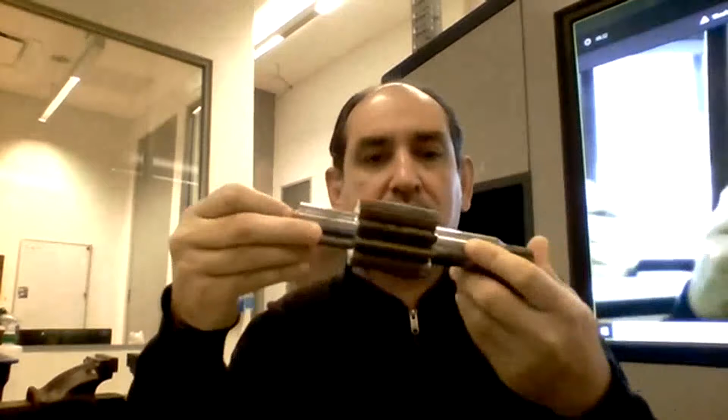We have operation number 2 until we have the 4 parts to be cut on the shaft. Later we hold it using the holes we had on both ends on the turning machine once again, and we do what we call the turning - this is called holding between the centers - and then we do the cutting of the gear using the gear cutter.

We set that to reduce machining time. We can have what we call the CNC turning milling center, which is a machine that can do both turning and milling at the same time, reducing time. Sometimes this can have multiple spindles, so this reduces the time for the turning and milling operations at the same time.

Later we need to hold the part once again, but between the centers we turn it. We use the grinding wheel to get a good surface finish on the sides. A special grinding operation should also be done for the teeth to achieve good surface finishing between the mating gears. Otherwise we'll get the gears stuck, which reduces efficiency and can stop the pump from working or starting.

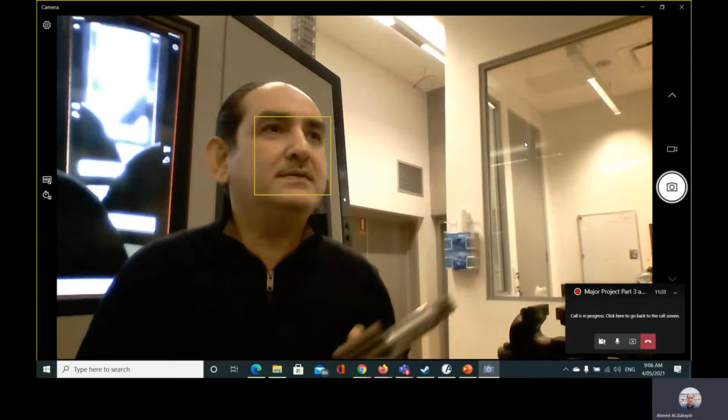To repeat what we just said, in the previous session we discussed how to make the shaft. We said the shaft is going to be done by cutting this bar on the milling machine, then the turning machine first, so multiple steps. The same thing applies for operation number 2.

We said we can accelerate that by doing the work on the twin spindle turning milling machine. Since it's a turning milling machine, the spindle itself has the indexing tool, which can be programmed to divide the circle into multiple stages, and then we can cut the gears and the splines at the same time.

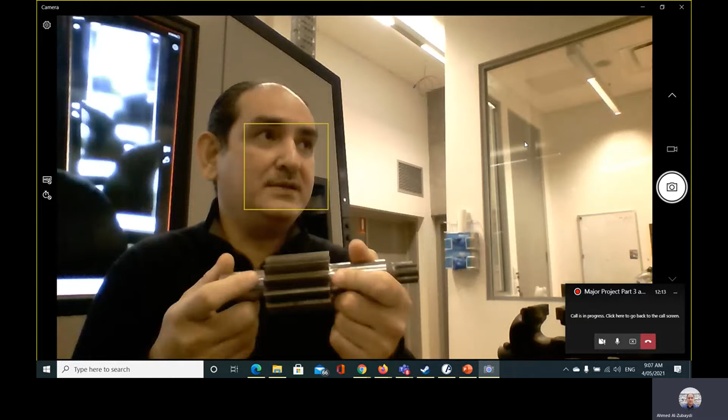Then we get the part finished. We only need to take it once again to the grinding machine to do the grinding process for the side, to have good surface finishing, and also we need to do some grinding for the gear teeth, because this is a critical dimension.

We should have very good tolerance between the gear teeth when they're mating, otherwise we're going to have an efficiency loss if there's a big gap. With close tolerance between them, this will hold the part due to high friction, or we'll get bad surface finishing. So this is a very critical dimension.

This is a very critical dimension because this will sit inside the bushes and should rotate at a very high velocity, so we should achieve that. Also the diameter of the gears, since they're in contact with the walls, should have very high tolerance in the dimension.

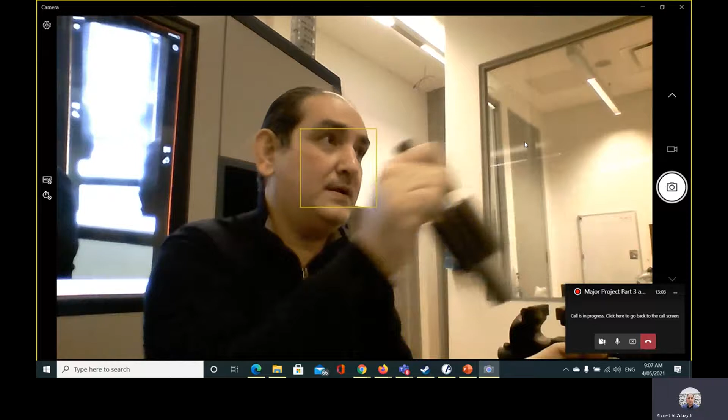So the next stage, which we're going to finish today, is how to make the main body. We said the main body is going to be made from ductile iron or gray cast iron. So you have two options.

Mainly it's going to be done by the sand casting operation. The pattern we are going to use is going to be exactly similar to that shape, but it's going to be solid, not hollow. The pattern should be solid.

We're going to make the cavity inside the two halves of the mold, and then we're going to use the core to generate the three cavities we're going to have here.

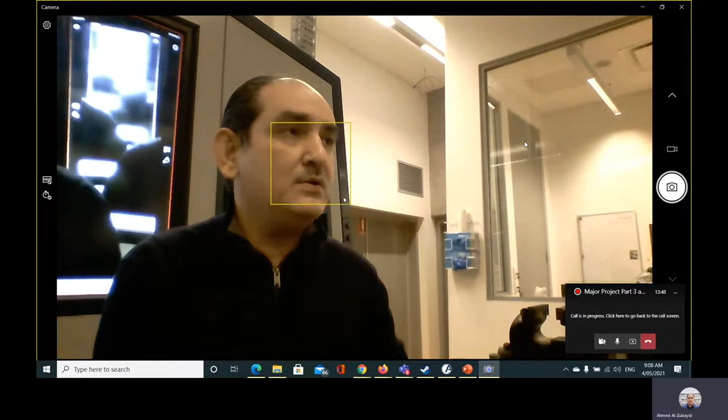Having these cavities gives us two important things. First, we save the material we'd need to remove later, because we only need to do boring for these diameters, saving energy and the amount of wasted material we'd otherwise remove.

In addition, from here we have direct access to the port. This simply creates the connection between the cavity of the gear pump and the port itself. This reduces the time for machining, and the complexity, since the height of the inlet is quite long and would require a special machine to do the work.

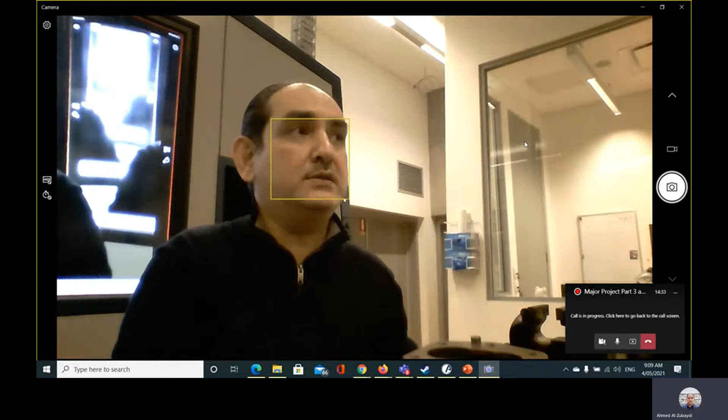After we achieve solidification for the cast part, we can remove the core. We said the core is actually going to be made of dry fired sand to be a little bit hard, and I prefer to have it as one part.

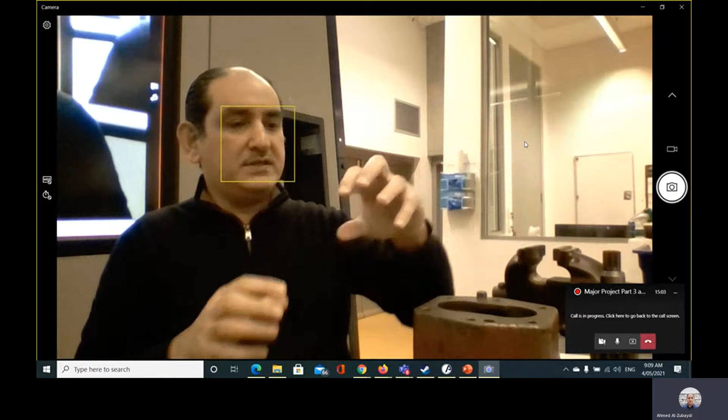So it's going to be something like the big shape of this cavity, with two extensions for the two ports, as one part, so it's much easier to hold inside the cavity, and also much easier to achieve the required shape internally.

We got the part, but the surface finishing for the cavity is going to be too bad, and the dimensions won't be accurate. We would like to have good surface finishing and accurate dimensions, and the way to do that is by doing the boring operation.

So first we're going to take the part, after we do the solidification process, to the milling machine.

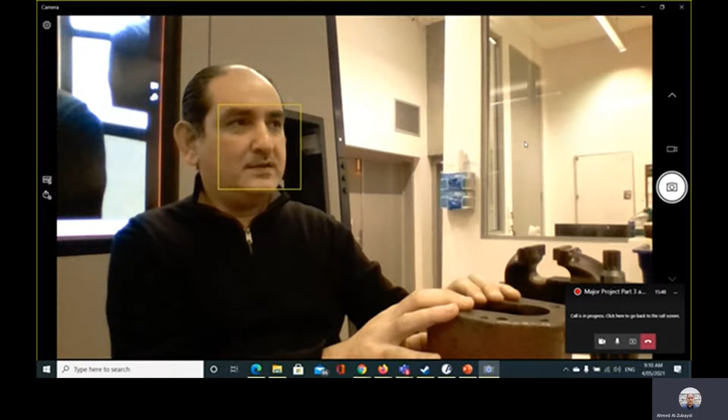So that's an example of the milling machine. You can see that I added the tool, which is the face miller, and by moving the part below the cutting tool, we're going to achieve the flat surface finishing there.

Even the holes, we can have the head of the drilling sitting on the milling machine itself. Of course, this is not a CNC milling machine, this is a manual one, but it can still do the job. Just moving the table in the Y direction and X direction will cover the whole surface of the top, and then we can flip the part and do the same thing from the other side.

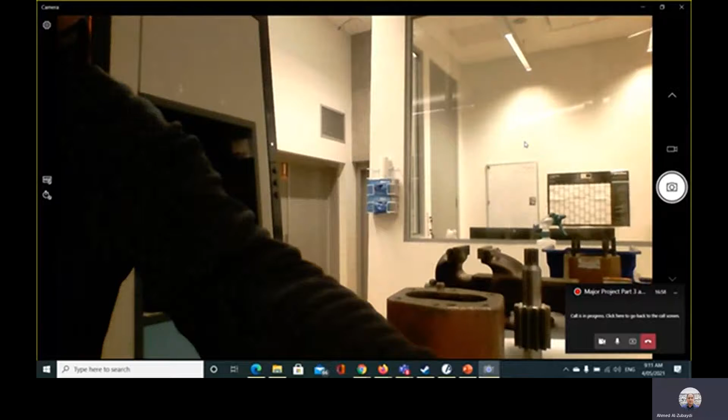To give you an example of the multiple stage cutting tool, let's say it's going to be a shank made of carbon fiber, and maybe it's going to have the same shape, or at least the same stages. We're going to have the cutting tool at every stage.

So when I rotate the cutting tool and insert it inside the cavity, by the rotation this cutting tool will expand the diameter, and the smaller one will do the same for the lower one, and then when we reach the end, they'll do the face milling for the surfaces.

So we're going to have the multi-stage boring operation - boring here, face milling on this level, the lower one, and the same thing is going to happen to the side where we insert the bushes, which once again is a critical dimension.

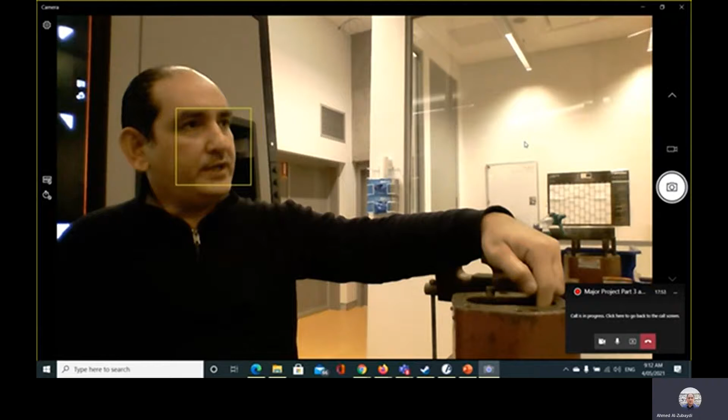So we did the face milling, we do the internal boring, and then we are going to do the drilling and tapping for the holes that will hold the threaded heads.

So we're going to do 6 holes drilling, 1, 2, 3, 4, 5, 6, and then tapping. The tapping is going to use a tool with the same thread we have here, so we can fix these threaded heads.

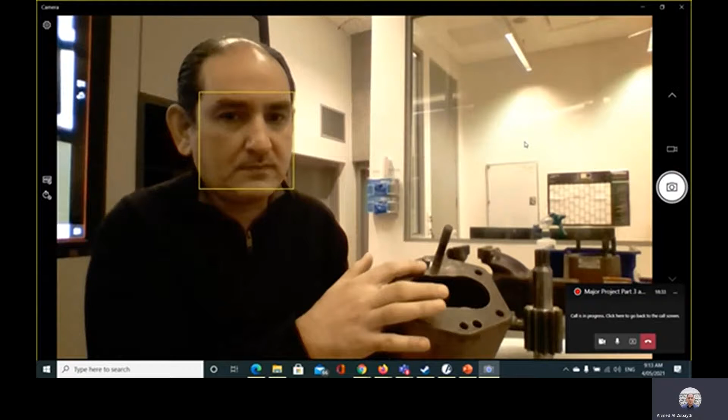And also we're going to have 2 holes which have very critical dimensions that will hold the dowels.

The dowels need to be inserted by a press fit, so we're going to have some pressure to fix them in and they'll be stable there. We can take them out by mechanical method, but we'll damage the good surface finishing of the dowel.

Now the dowel is a critical issue because the location and dimension need to be very accurate. We need to do the drilling first, then do some expansion for the diameter using the reaming operation.

So the reamer is going to have straight lines and will increase the diameter by a fraction of a millimeter to make it very accurate. In addition, it's going to give very good surface finishing.

Now we finish with the first phase. We're going to take the part to the second phase, where we'll repeat the same operation by doing the face milling here, and then we're going to do the internal threading using the milling machine.

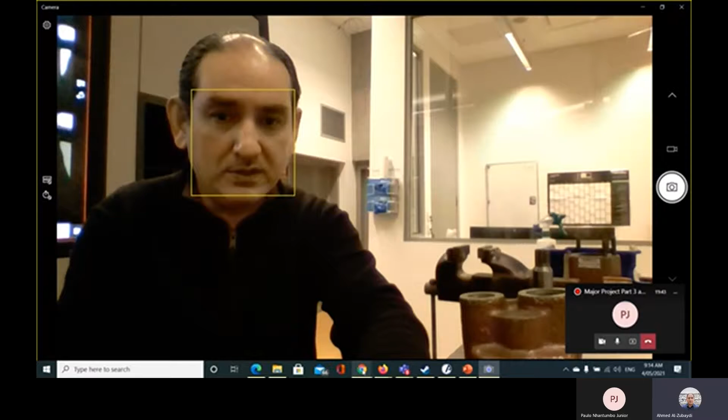To show you how to use the milling machine to do the internal threading for the holes, I've prepared a video here. Okay, so the first video is going to show how to make the internal thread. I'm going to go back once again - well, actually, you can take the name of this.

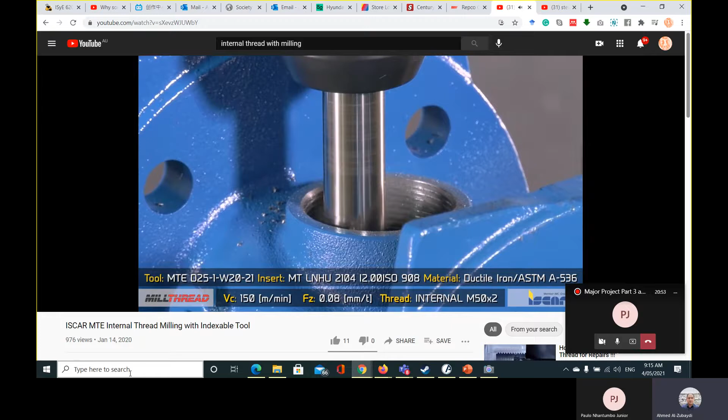So we can talk about the boring head. Which one is going to be a shorter video? All the videos are quite long - boring video on the CNC milling machine. So we will try to watch just a little bit of this video.

At least we're going to have the... A small thing can make a big difference. See this here? That is what makes the difference between having the capability to ramp with... Wow, that's really boring, get it? Because it's a boring video.

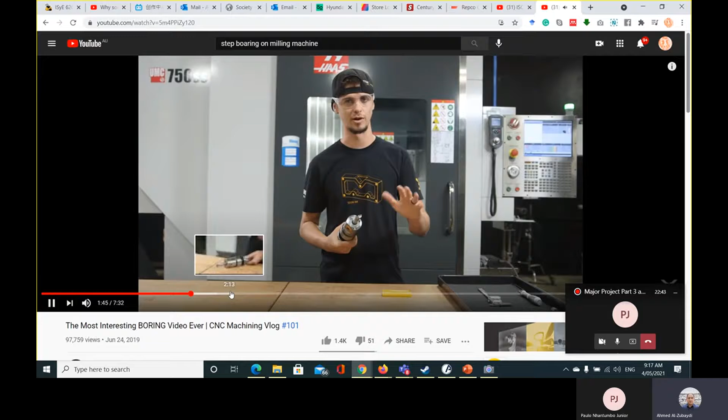Hi, I'm Stuart McConaughey, and today I'm going to show you how to bore this 6AL4V titanium. It's about to get crazy, it's about to go down. Boring these beautiful 1-inch holes that have a tolerance of plus or minus 5/10 in this rocket part made out of 6AL4V titanium. And I get to show you this awesome Kennametal boring head that you can control all the way to 80 millionths of an inch. All right, so today I'm going to show you how to set up a boring head. First, maximum diameter is 1 inch and 53 thou. We're going to bore, and I'll be roughly at 1 inch - perfect size.

Okay, so I will keep that.

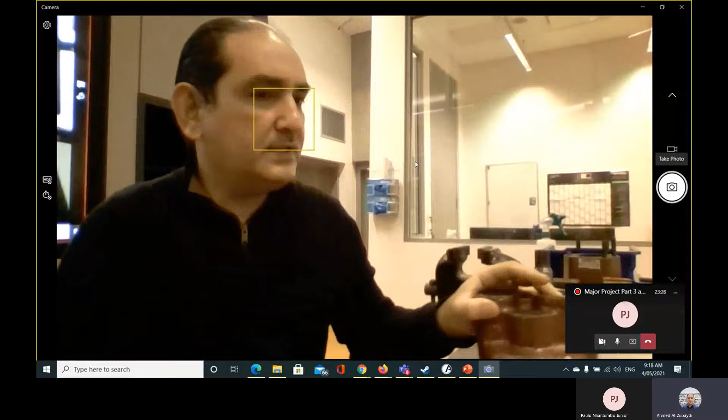So let's go back to the camera. Now we talked about that - the same operation is going to be repeated for making the cap. Once again, this will be casted, and then we're going to do some face milling and drilling, this will be at 4 holes, and this should be at the same location as the one we had on the main body. Otherwise, you're not going to be able to fit the threaded parts at the same time.

I was just wondering, do we need to make a CAD model of this or just the program? Well, I think that we already have some CAD models available for you on the canvas, you can use them. But if you would like to take some photos and use it, it's not going to be an issue.

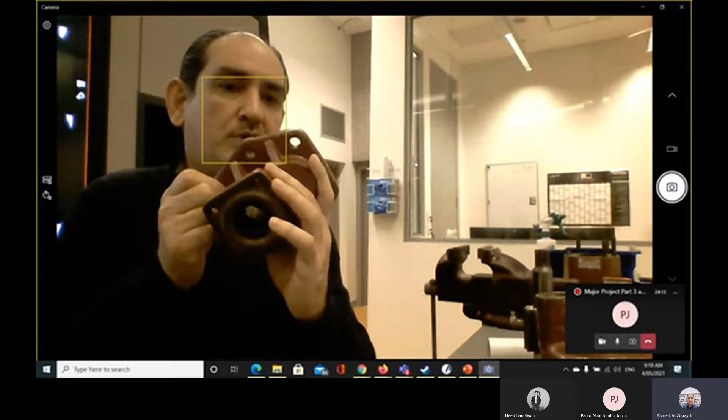Okay, so just remember that these holes are through holes. The diameter is going to be larger than the one we had on the main body because we're going to have the free movement of the threaded parts within. Same thing, we're going to have the dowel, and these dowel holes should be opposite and at the same location, compatible with the main body.

We are going to do the cut for what we call the slot here. This slot is going to accommodate the lip seal, which is going to prevent the leaking of the oil under higher pressure.

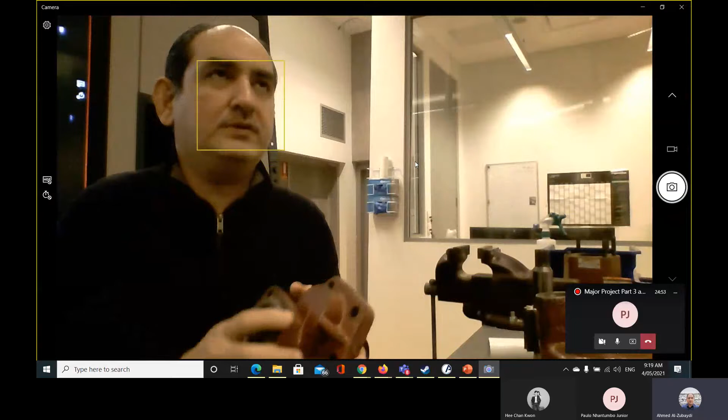And also we need to do some boring here, and then we need to - yeah, I think the boring is going to give you the good surface finishing. Now the same operation I will repeat here once again: face milling, again to cut the slot and the drilling of the through holes, and done for the main body.

So in the next slide, we are going to check the operations again, and we're going to show what are the critical points we are going to have for this pump. This will be the main body. Actually, I should have done that 2 weeks ago, but once again, we were busy with making and testing of the pump.

So to do the work on the milling machine, you need to hold the part. Otherwise, it's going to push due to the force of the cutting we're going to have from the cutting tools. And to do that, we use something called the clamp. You can see that's the clamp, which holds the part on the table. Then we can do the cutting.

The clamp usually is going to be holding the part from the top, and this is not going to be suitable if we are going to do the face milling. So the other way to do it is just using the vise, like the one we use on the drilling machine, the vise which is going to hold the part from the side, then we can do the work freely on the top and internally.

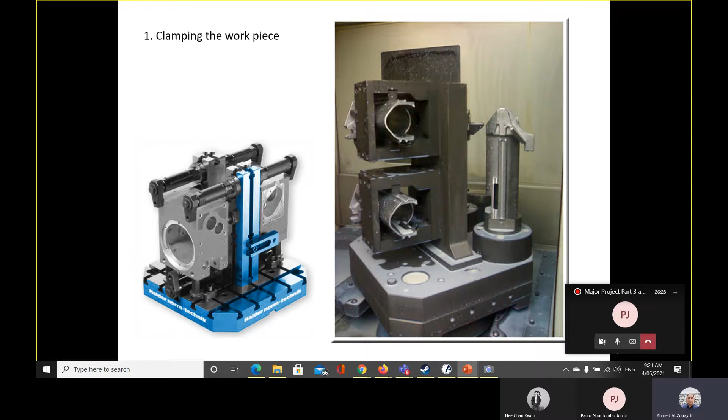In this operation, you can see that we are going to have a special clamping which can hold multiple parts at the same time. And this is what we are going to use in a CNC milling machining center, which can do multiple parts at the same time.

So you can see that these are the clamps. Again, the clamp is holding the part from the top, and this will be good if we're going to do some internal cutting here. But we're not going to be able to do any face milling because we're going to hit the clamps themselves. Maybe this will be useful if we're going to do the work on this side, because we only get to limit the work on this area, but it's not going to be useful again to do it for the face milling on the top face.

Usually all the clamps are now automated to reduce the time and the efficiency of the work. So they're going to be moved by using the pneumatic pressure we're getting from the cylinder. So even the robotic arm now can handle the part, the work. It doesn't need any interference from the human to tighten up or remove the part.

Different shapes of the clamping, as you can see here. And as I told you, most of this clamping is not going to be useful for the face milling or the top surface, because if I get to clamp it...

Let me show you that in the video. If I get to clamp it, that means I'm going to have the clamps at the top here. This is not going to enable me to do the face milling. So we always go to hold this part by using the vise from this side, and then we can do the work freely.

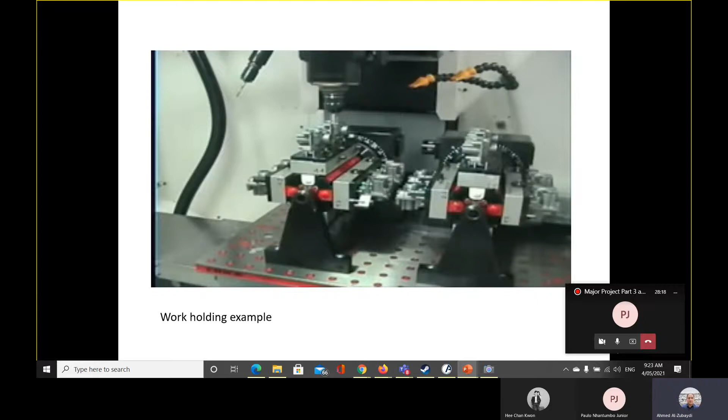Now you can see here, this will be the boring operation. We're holding multiple parts at the same time, and this will increase the efficiency of the work because we're going to reduce the setup time. Now I do the setup for 2 times 8.

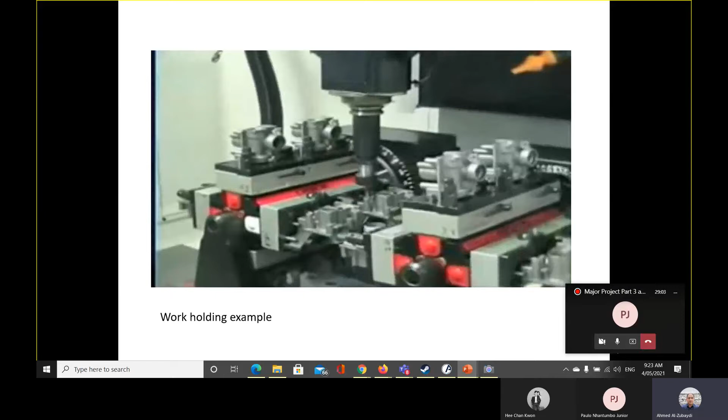As we have 8 on each side, so total I get 16 parts to be machined in a single setup. Once again, this machine is called the machining center. It can do most of the operation at the same time. Now this will be the reaming operation of the boring to the dimension, and we can do some tests. This will be the turning operation, the drilling operation, and this will be the tapping operation to make the internal thread for the drill holes.

Okay, and of course we can set it to the other side on another machine and do the same thing.

Usually we're going to connect that to a conveyor belt. The conveyor belt is going to feed the setup one after the other, and this will reduce the time for the stopping and the setup for the part inside the machine.

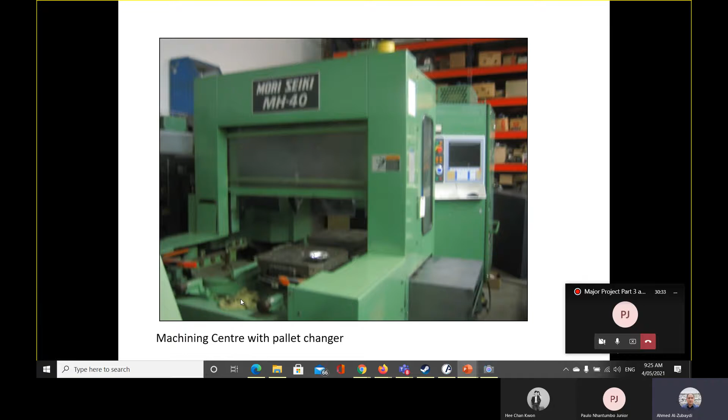Is that video? Now, this will be for the pallet changer. So instead of having the sliding, this can work on a conveyor belt as we mentioned, and we can do the operation at a faster rate.

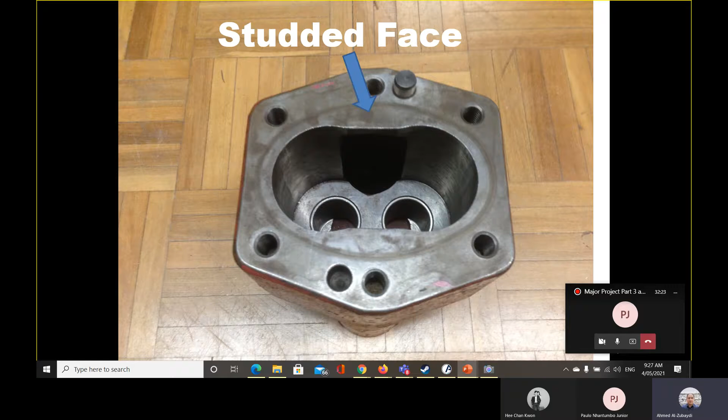The face milling cutter, well, later with the same setup, we can do the drilling and the threading of the threaded holes. And we can do the drilling and the reaming for the dowel holes.

The other two work we're going to do with the same setup is the expansion of the size for the gear and the bush bore, and this will be done by the boring operation. We said that we can use either the normal boring operation or we can do the multi-stage cutting tool to reduce the time of the machining.

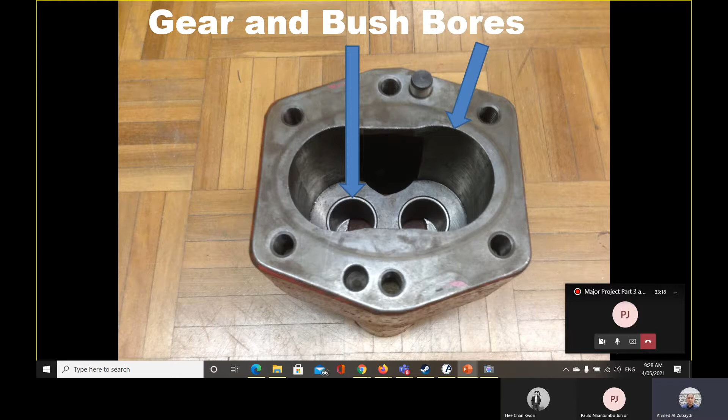We mentioned that. Then we can turn the part to the other side in the second setup to do the work on the inlet and outlet ports. First we are going to do the face milling for these two faces, and later we can do the internal thread using the milling machine operation.

So that's how it's going to work. Simply rotate, pass it through the face, and it's going to remove a layer.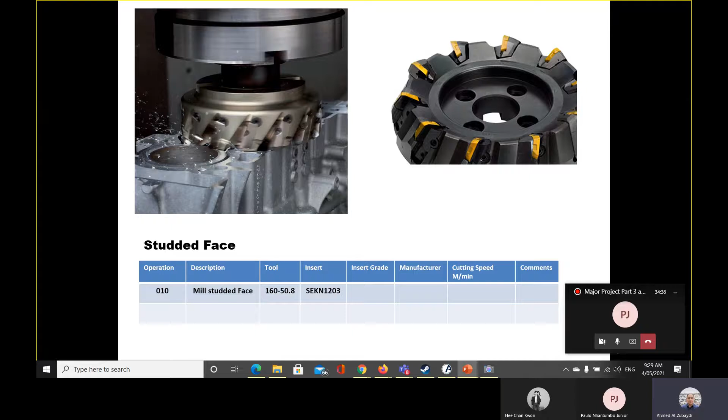The tool in this photo is the 160, 50.8. For the insert, we're going to have the golden one, the SEKN 1203. These are some specifications of the cutting tool. You can use K20 as the insert grade, and the recommended cutting speed for this operation is 120 meters per minute. We can add an imaginary supplier for this cutting tool.

The next step is going to be drilling the cap screw holes.

This will show the face milling operation in slow motion. You can see that face milling is a discontinuous operation.

We can see the blue part here, which we call the clamp, holding the part on both sides.

Again, we said that we can do the boring and face milling operation for the gear and bush bores using either a normal cutting tool, like the one we saw in the machining center operation, or a custom multi-bore and facing tool to reduce the time.

Once again, you can see the tool in this photo has multiple diameters. The small diameter is the same size as the bush bores, and the larger one is the same size as the gear bore.

We said that these bores have already been created using the core inserted inside the casting hole, and we only need to expand it to the final dimension.

This operation can be done in a single step. We take the tool down and back up, and the face has been generated. We can repeat this on both bores.

So the description will be the rough bore gear and the bush bore. The tool is going to be the custom multi-bore and facing tool.

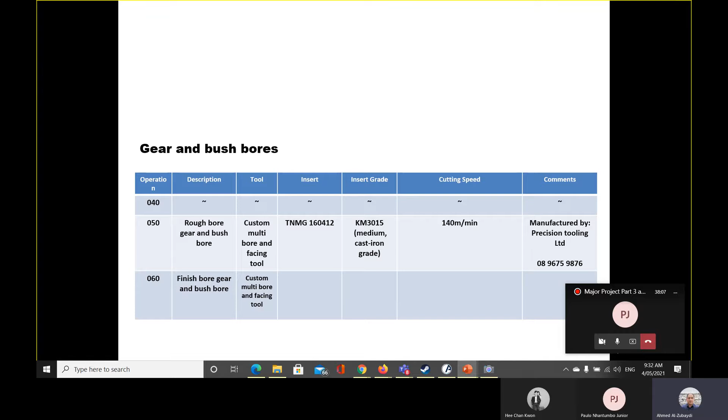This will be a short video showing how the multi-step boring tool works. You can see the stages we have here with the inserts. The one we just inserted is the internal one, the other stage is for face milling, and the third is for the outside turning operation. So we did multiple stages at the same time.

So the stage we have here once again is stage number one. This will be stage number two.

We do the face milling and we do the external boring. So we use 4 inserts to achieve the goal. Okay, and we saw how we are going to do the work on the other face.

Now I have some videos here which are going to be very useful to show you what we're doing. I think we saw this video, the face milling, the gear hobbing and the splining hobbing. I think this will be useful.

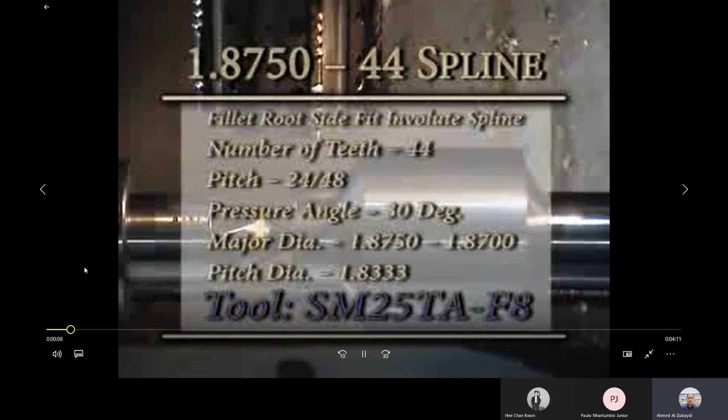On this H13, I will machine a 24, 48, 44 tooth exterior spline. I am using our 8-flute replaceable insert shell mill. The size of the shaft is 1.875 inch. I will rough, then do a finish pass.

Roughing will be at 921 surface feet. My RPM is 1,600, and with a chip load of 4.7 thousandths per flute, I will be machining at 60 inches per minute. The finish pass will be at 2,500 surface feet. My RPM is 4,500, and with a chip load of 0.8 thousandths per flute, I will be machining at 30 inches per minute.

The approximate cycle time is...

Process techniques and process. Procurement of raw materials. Incoming raw materials must pass RoHS and relevant quality and safety standards and be certified by our QC department before further processing.

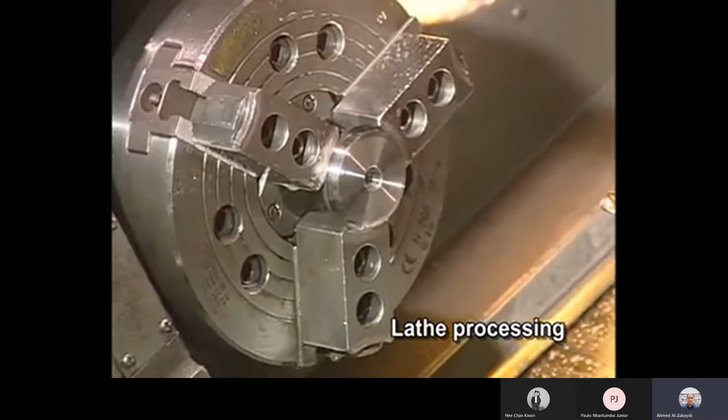Once the raw material passes the QC standards, it is then put through CNC machining to achieve pre-shaping. The entire process is done by auto-feed CNC equipment to ensure high productivity and precision finished products.

Vernier height gauge, run-out inspection machine, etc. are used to check the length and concentricity of the finished product.

The purpose of knurling is to improve the shaft in the way of being firmly fixed on coiled silicon steel sheet.

Quality control personnel then inspect the outside diameter.

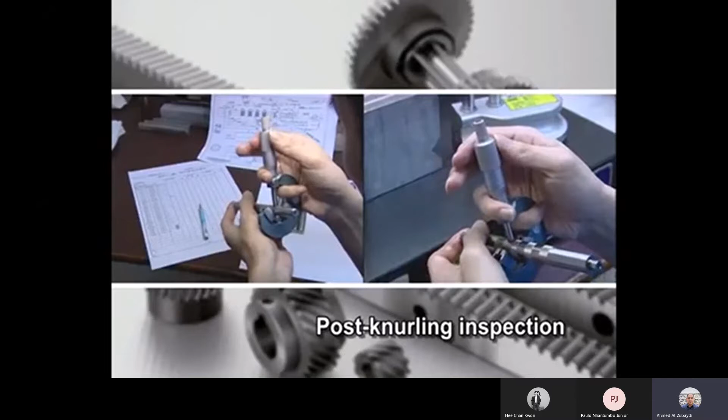Advanced equipment imported from Europe and the U.S. is our best auxiliary to achieve excellent quality standards and production efficiency. As an example, the Swiss-made Gleason-Pfauter P60 is used for rolling the motor gear shaft and skiving the shaft.

A U.S.-made Phoenix 125GH by Gleason is used for machining automotive gears.

Several Koepfer 200s have been imported to meet the increased hobbing and skiving demands in gear and motor gear shafts.

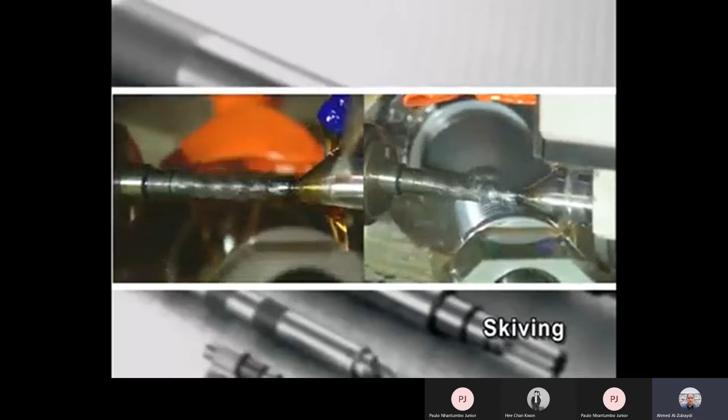The tooth lead and tooth profile of the skiving process products are then inspected by a specialized inspection machine to ensure the quality of the finish. We said that this will be good.

Gear lapping is a surface treatment of the gear and a common way to increase gear precision. JIS 0 or DIN 4 is attainable by this method.

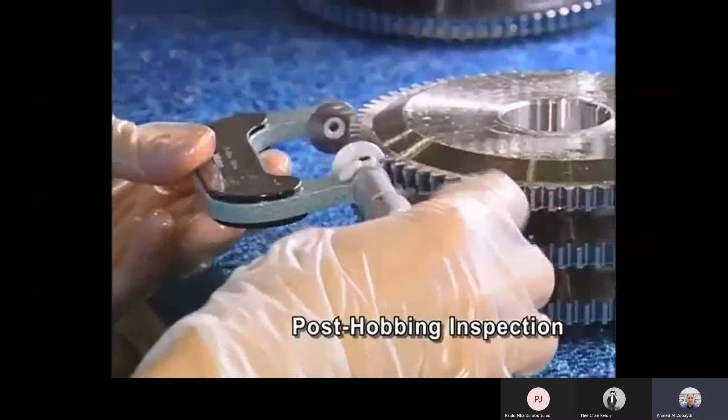What Jesse mentioned now, in addition to the state-of-the-art inspection equipment used to carry out computerized inspection of gear profile, gear lead, and pitch, QC personnel routinely sample the tangent length, root diameter, topping, and outside diameter.

We also provide heat treatments such as carburization, high-frequency hardening, and nitrification to harden the surface.

Heat-treated final products will then go through slice sampling and embedding inspection to ensure the correctness of the hardened depth and stability.

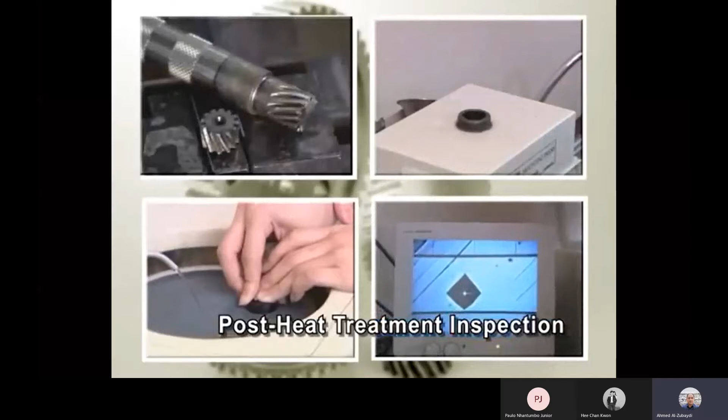The precision grinding of the shaft increases its roundness. And then a full inspection of our final products in terms of the outward appearance and outside diameter.

To further increase product quality, an automatic ultrasonic cleaner is used for cleaning and drying to prevent rust caused by residual moisture on the final product.

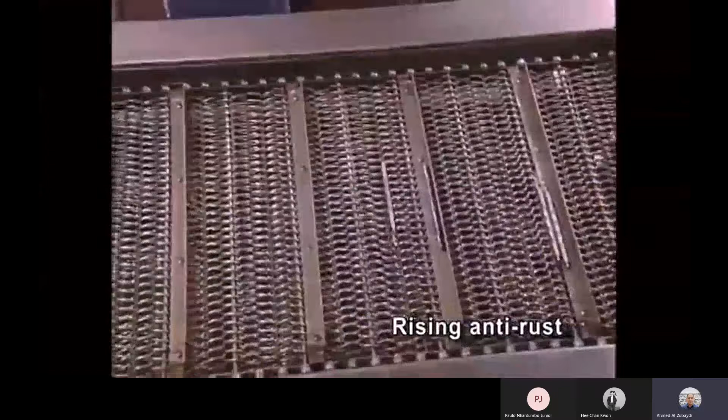It is then packaged to ensure the integrity of the product during shipment. Finally, the product is shipped to the customer designated location, accompanied by a complete shipping and inspection report.

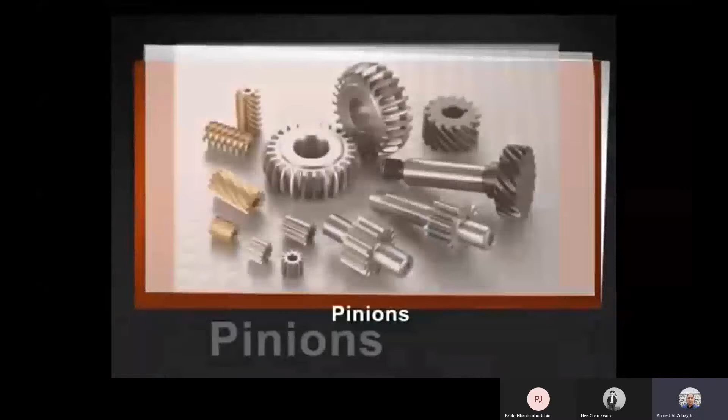Product series: pinions, shafts skiving, shafts, cranks, gear racks and grinding gears, bevel gears - that's a list of their products, worms and worm wheels.

We need to cover all that. So what we learned from this video is the operation and how to do the inspection, because you'll need to write down a part about the inspection - that's the inspection for the shaft and the gears. How to do the inspection for the main body?

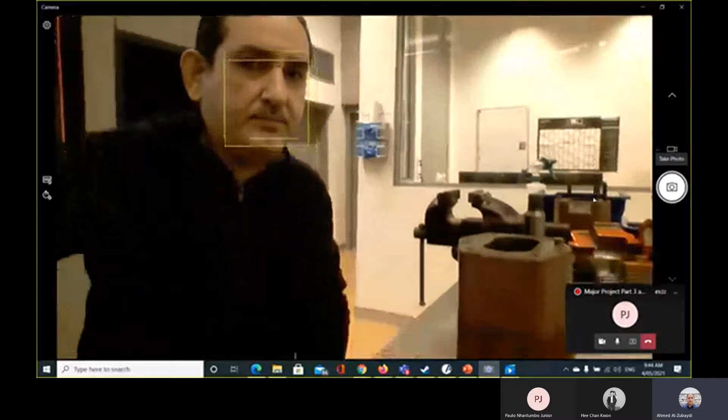Now you remember that we talked about the engine block earlier and how to do the inspection for it. I casted this part and I would like to do the inspection for it. So the first thing, again, is to take a look at the thing visually, and I will see if all the cavity has been covered - that's done. So step number 1 has been done.

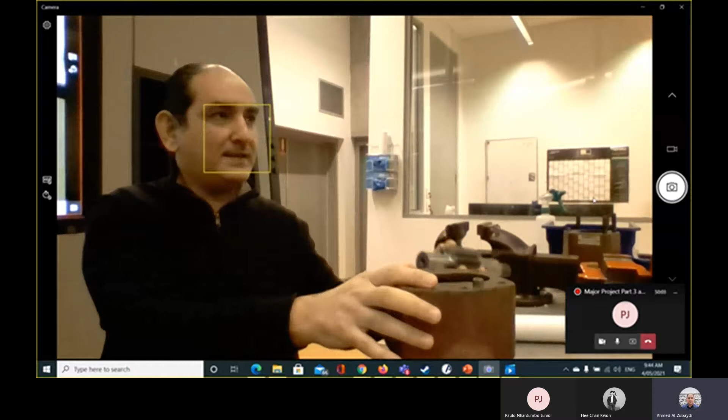The other thing I can do is some tests for the part itself. Sometimes I can get internal cavities, for example if part of the mold has fallen down, sand is going to be built in inside. So I can check that - not me, of course, the expert. They get the hammer and start to knock on the thing to check the solidity of the part.

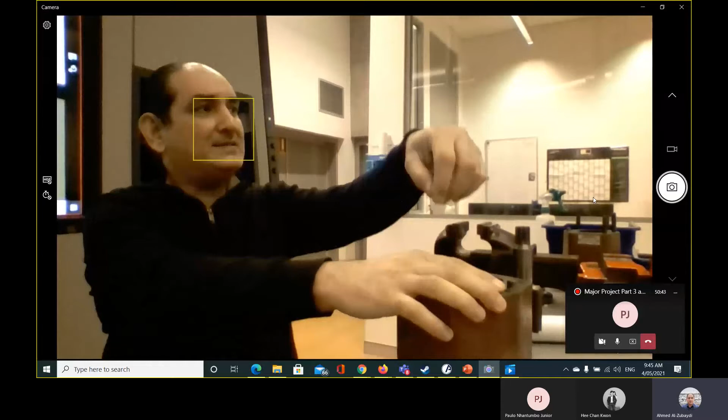The other thing is the last inspection for the whole thing - you can do multiple inspections. The first one: I put the cap on the part, plug all the outlets, and leave one to add some pressure inside the pump. So I add very high pressure using the water and then lock it under constant pressure. The main body should take the internal pressure to a very high amount.

For example, if the pressure I'm going to have here is 360 kilopascal, or 60, or 30 kilopascal, I always put the pressure with the water doubled, and leave it for example 3 hours just to check if this part is able to hold the internal pressure without the gears, by the way - I'm filling with water without the gears.

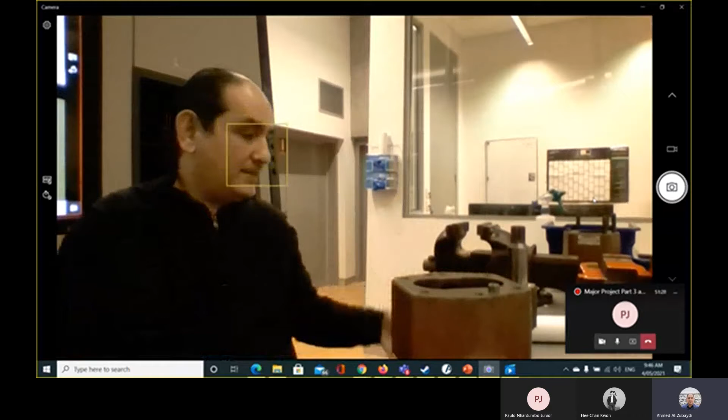Now, why are we using water, not oil? Because water is a clean material. So even if things crack, I'm going to have some water on the floor instead of having oil spilling all around.

The final test we're going to do for the pump: I put everything in, seal, assemble the pump, then connect it to a machine which does the actual pumping. So for example, if the velocity is going to be 1000 RPM during operation, I run it at 1000 RPM and check how many hours it will work. Then I take the part and check which part has failed. I'll do the operation multiple times.

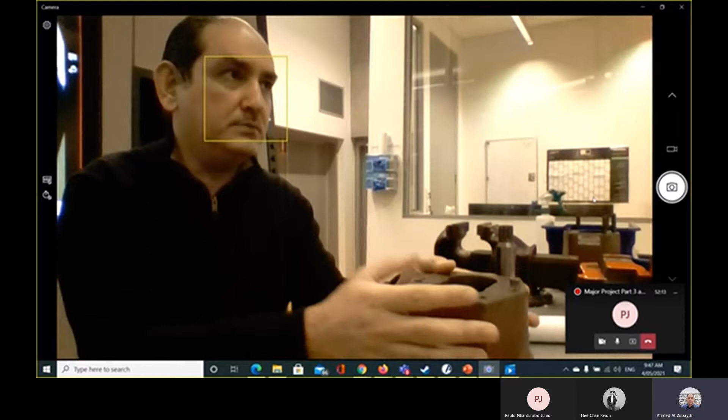Of course, this will be when you do the research and quality control operation for a big factory. You're making multiple parts, then you find out what the weakness point will always be for this pump. Then we can avoid that by changing, for example, the material or the manufacturing process. So let's check what other video we have.

Gears are mechanical components used to transmit power and motion through the successive engagement of their peripheral teeth. Gears perform certain key functions within machines and assemblies, such as reversing the direction of rotation or altering the angular orientation of rotary motion. Gears are also used to convert rotary motion into linear motion and vice versa, or to alter gear speed ratios.

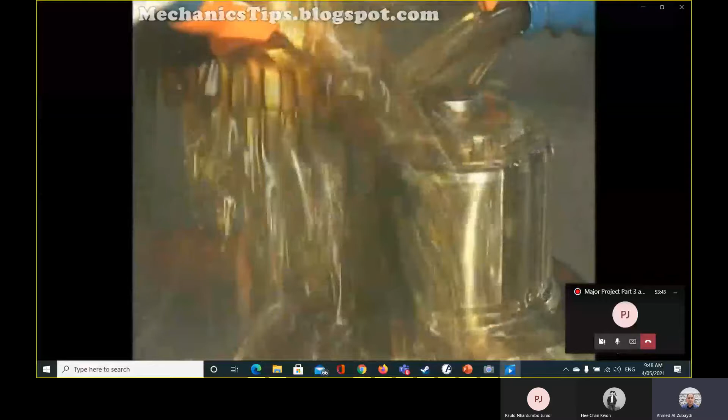The methods of machining gears can be classified into two primary categories: gear generating and gear form cutting. Many of the processes used to machine gears may also be used to finish gears.

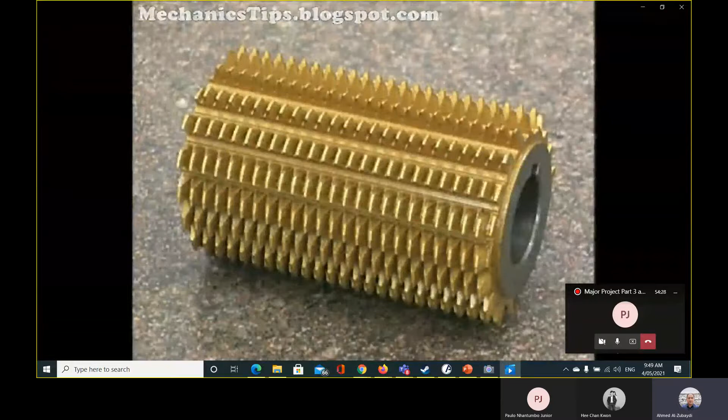Gear generating involves gear cutting through the relative motion between a rotating cutting tool and the generating motion or rotation of the workpiece. The primary gear generating processes include hobbing and shaping. In hobbing, gear teeth are progressively generated by a series of cuts using a helically fluted cutting tool called a hob. Both the hob and the gear blank rotate as the hob is fed axially across the face of the blank.

Hobbing is the principal method for producing spur gears and helical gears, and is also used to produce many special gear forms. The main limitation of hobbing is that it can only be used to produce external gears. Hobbing can be performed on a single gear blank, but also allows for the stacking of workpieces to increase production rates.

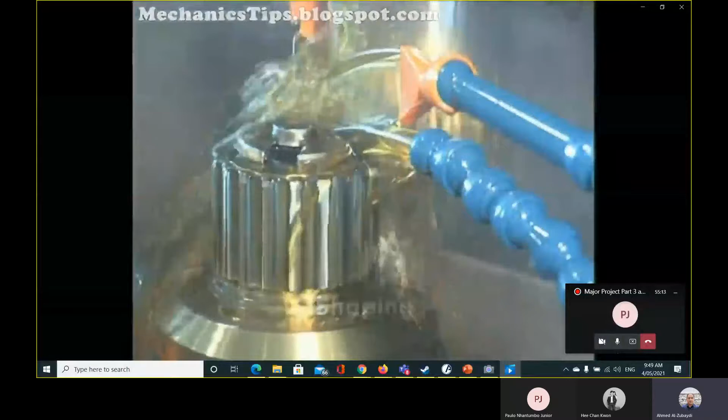Shaping generates gear teeth by rotating the workpiece in contact with a reciprocating cutter. The reciprocating cutter may be a pinion-shaped cutter, a multi-tooth rack-shaped cutter, or a single-point cutter. The pinion-shaped cutter's axis is parallel to the gear blank and begins cutting by reciprocating while feeding gradually into the blank to a predetermined cutting depth. The cutter and gear blank rotate slowly at the same pitch circle velocity as the cutter enters and exits the cut, incrementally generating the gear teeth.

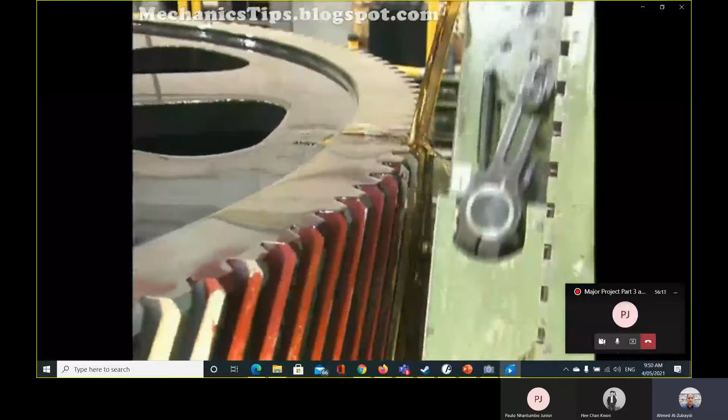Rack-shaped cutters typically have between 6 to 12 teeth that reciprocate into the gear blank. Once the rack cutter finishes a pass, the cutter is disengaged and returns to a starting point to begin cutting again. When shaping with a single-point cutter, the cutter reciprocates, making successively deeper cuts until a predetermined depth is reached.

Gear shapers are used to make internal gears, shoulder gears, and many other gear types that cannot be produced with hobbers. Shapers can also produce non-involute shapes, such as a cam and gear on the same shaft.

Gear form cutting typically involves the use of formed tooth cutters that have the desired gear shape or profile. The primary gear form cutting processes include broaching and milling.

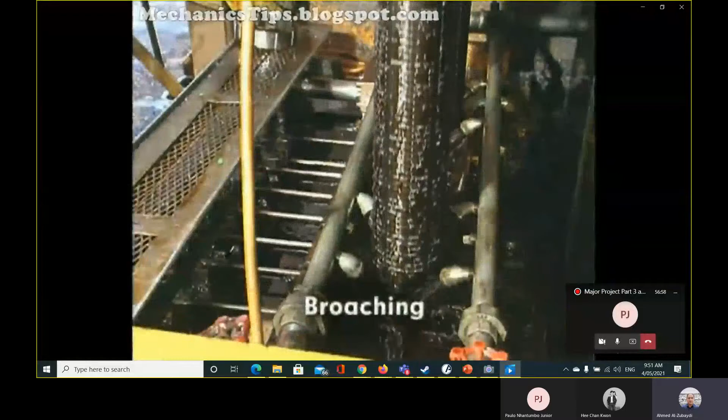Broaching is the fastest method of machining gears and is performed on many different machine types using a multi-tooth cutting tool called a broach. The broach or the gear blank are pushed or pulled relative to each other to remove material. Each tooth on the broach is generally higher than the preceding tooth. As a result, the depth of cut increases with each tooth as the broaching operation progresses.

The conventional method of broaching is used mainly to produce internal gears. For external gears, pot broaching is used. Pot broaching is performed on special machine tools having a hollow broaching tool assembly called the pot. Gear blanks are either pushed down, pushed up, or pulled up through the pot to generate the gear teeth.

Milling is a machining process that uses the relative motion between a rotating, multi-edge cutter and the workpiece to generate gear shapes. Milled gears are typically produced using cutters that mill each gear tooth space individually. To produce large, coarse pitch internal or external spur, bevel, or helical gears, a process called gashing can be used on heavy-duty milling machines.

That's a very important thing, because he keeps saying something about helical gears and bevel gears. If the teeth go straight from one side to another, we call them spur gears. If they're inclined, we call them helical gears. Of course, there's a difference in performance between both. Usually the helical gear is better, but the problem is it rotates at lower speed. The efficiency is higher because the contact area is larger, so the force that can be transmitted is higher. But for velocity, it's a bad thing. Also, the machining process to cut teeth helically is more expensive than for spur gears. You will cover that in machine design later.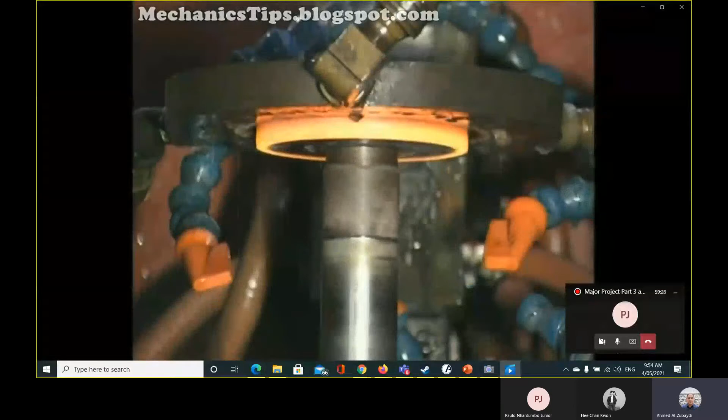After machining, gears may require heat treatment to meet hardness requirements. After heat treating, gears usually require finishing to nullify any distortion that may occur, such as on a grinding machine. In some cases, gears are machined and finished before heat treatment, and then once processed, surface finished to remove distortion from the heat treatment.

Okay, let's see what other video I have. I think we saw this one. I think I have another folder which contains the last part for the gear pump, and I think it would be a good idea if we cover it today. But before that, I think I also have some videos for some of the inspection processes we can have for measurement of the gear. We're going to watch some of these videos now before we go to the slides. That's the gear pump. Let me hide this.

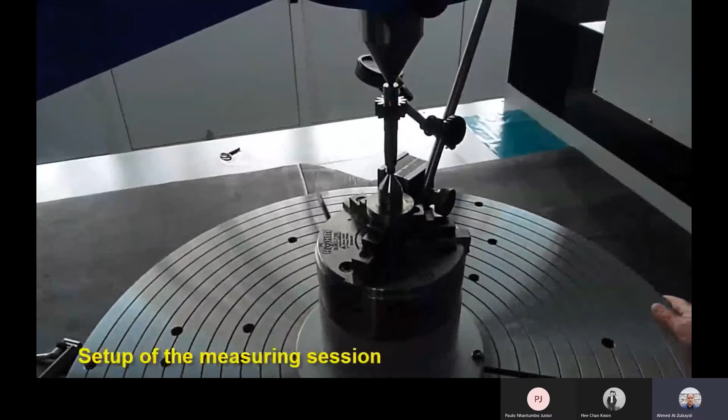This will be very useful for you to write down the report, because you can see how they do the measurement for the gear teeth and for the shaft at the same time. So they're using a dial gauge. They're moving both, and at different positions the dial gauge should read zero. Otherwise, that means the shaft is not properly aligned.

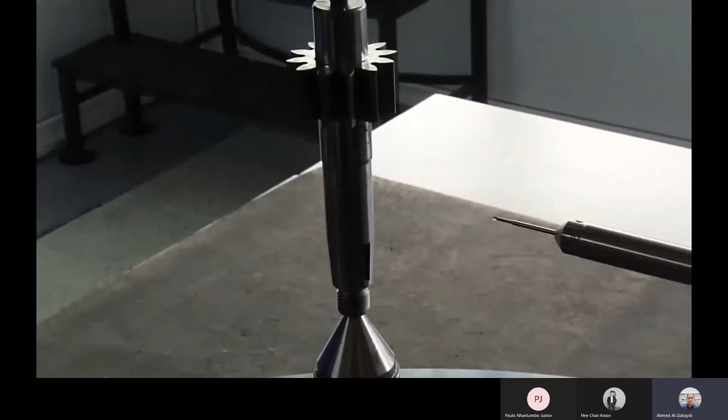The CMM machine, once again, is going to check the surface roughness, the dimensions, and coaxiality for the part. Remember that we use this machine in the lab. We said this will be the probe. It will check if this part is coaxial or not, whether it's aligned or has some misalignment due to the cutting. It also checks the teeth flank dimensions, if possible.

You can take some photos from this video and add them to your report.

I think there are more operations to come. I don't want to spend most of the time on this.

So you can show us every test, that's another thing on how to check. Well, these are the results from the test we just saw. Now that's the test for the main body. Once again, we're going to check the heights, the surface roughness, the dimensions, and the hole diameter, exactly what we did in the lab. We just move it on multiple points and calculate what will be the diameter.

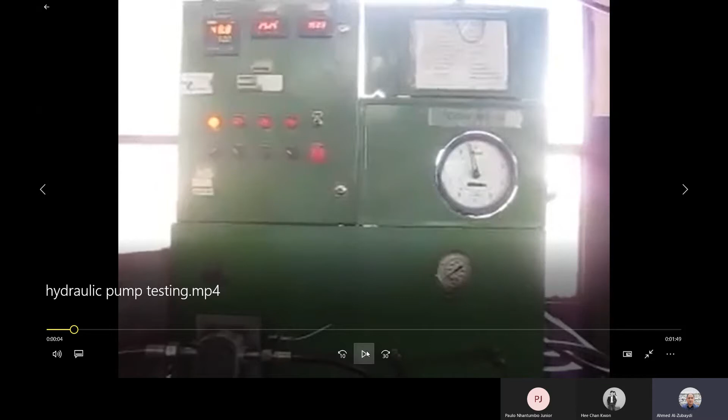Okay, next video. The test I told you about, how we can check the pump for the internal pressure.

The pump is going to be found from here. The efficiency, the flow rate, the RPM value, all can be found. The pressure as well can be found from this test.

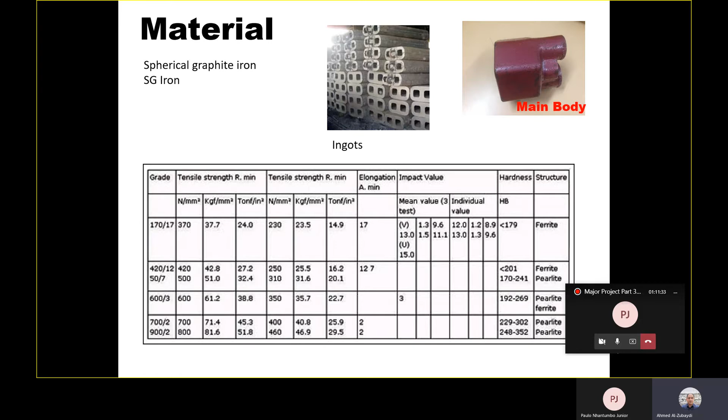Usually for this part, it's going to be done by using the green sand casting method, and the mold should be closed.

Then the casting should be ready for the delivery to the client, who's going to be you. Now, why we said it's ready for delivery to the client is because usually the casting is not going to be done in your workshop. It needs a foundry to do the work. We do some transportation, and this will be a logistics task. The movement through the factory, we can have multiple types of material handling systems.

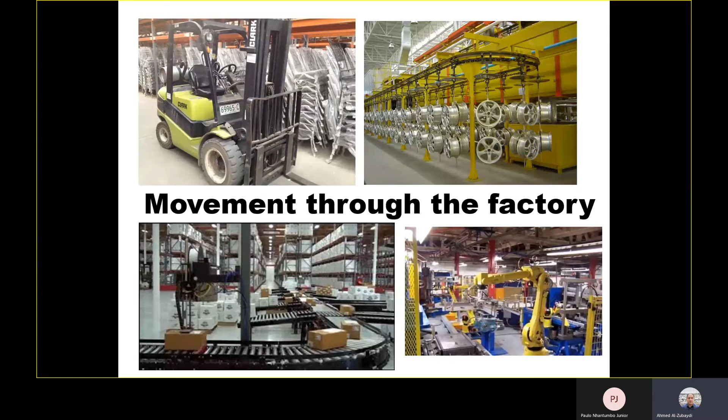Do some inspection, check that the dimensions are correct. Once again, we can do the destruction test to check if the quality of the casting is good. If not, just send everything back and ask them to redo it for you. For further inspection, we can use the CMM machine to check the dimensions and the quality of your work.

Now we're talking about the driven shaft. Mainly what we worked on was the drive shaft, but the same talk can be repeated directly for the driven shaft without any details you need to add.

The driven shaft, like the drive shaft, is going to be made of a bar. So the bars need to be pre-manufactured in the milling factory, and then we are going to select our bar stock. We said the bar stock we're going to use for our work is the one with the 60 millimeter initial diameter, and we are going to reduce the dimension to the required stage.

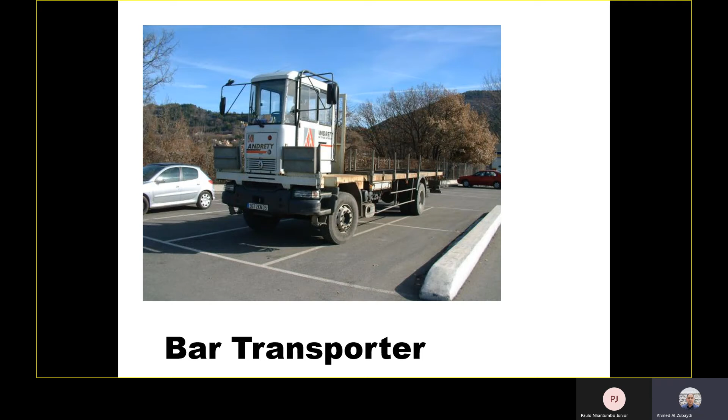Usually the bar transporter is going to be specialized for transportation of the bars. It's going to have a special shape, and we usually cut the part to the length in our factory, using the same machine to pre-cut it, then leave it for storage if required.

Now it's very important to check the dimension of the part. We buy it at 60 millimeter, we need to check it. The problem is going to be if the bar diameter is more than 60 millimeter, because this will affect the insert of the cutting tool depth.

For example, I'm going to insert it to 1 millimeter, and the force is going to be calculated by the machine for 1 millimeter. But if the diameter of the shaft is more than 60 millimeter, this will increase the depth, for example by 2 millimeter, and this will break my cutting tool. So that's why we always need to check the actual dimension we are going to have.

Hardness test to check what will be the hardness for the shaft, and whether it's going to be compatible with the specification of the supplier or not.

Usually when we do continuous machining for bar work, we need to use something called bar feeding, where it's going to have multiple items at the back. We're going to feed it a little bit at a time to the machine and do the machining on them.

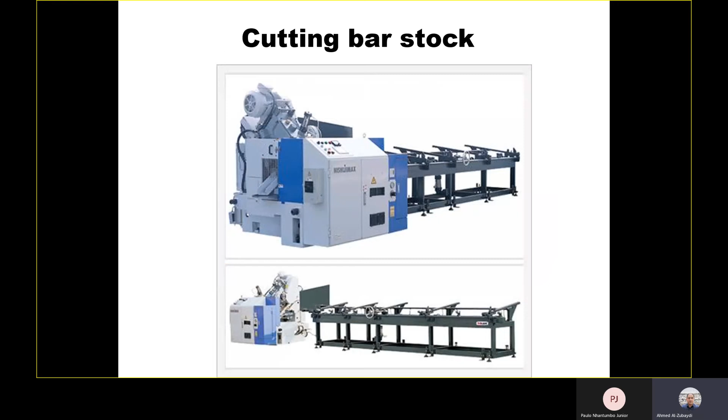The driven shaft is going to have the same thing, and the cutting bar stock can be pre-cut before we feed it to the machine. This will be machining the shaft gear blank. You can see that this one is going to have the twin spindle.

We said the twin spindle is going to be optional. Usually you do your work on a single spindle machine and have to change the size manually, or you can use two different machines, each doing an operation. For example, the first one cuts the first three stages, then the second one cuts the last stage.

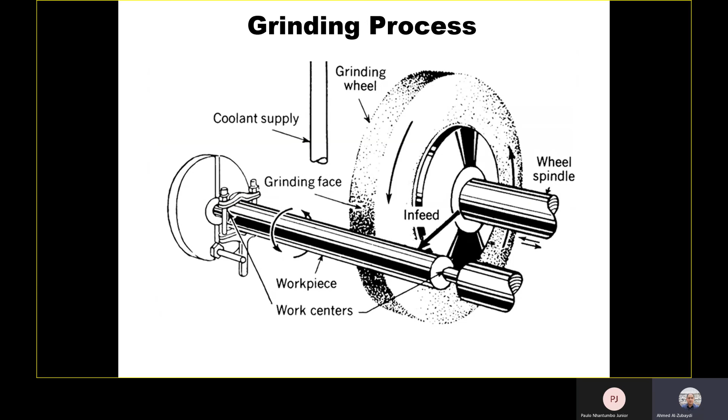The grinding process is going to be followed to get a good finish. Grinding is also done for the gear teeth to achieve good surface quality. This is the grinding for the gear teeth, as we described, explaining why we need to do that. Final inspection for dimension and surface finishing should be done before we finalize the product.